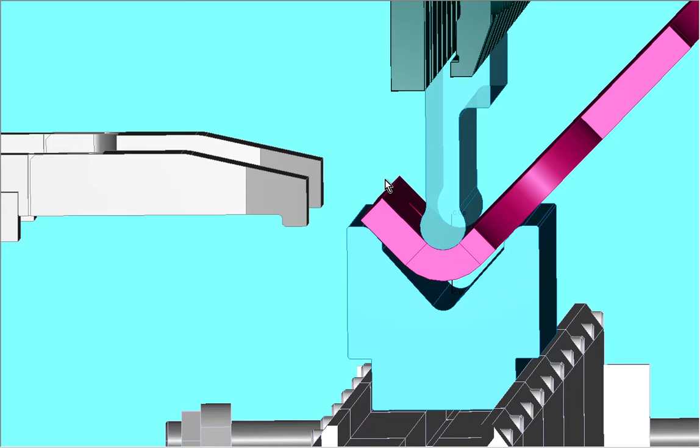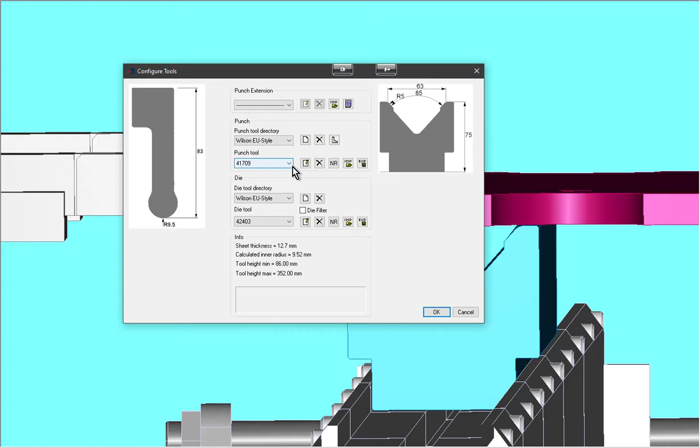I want to show you we've been forming these parts, trying to follow the CSA guidelines to prevent cracking. I'm just going to show you here. This is the punch, and this is the die that we were using.

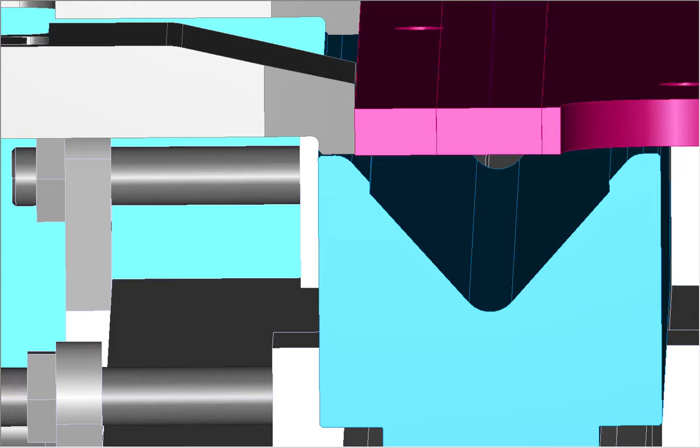As you can see, this bend here, the one that the email is about, needed more material because it's not even sitting on the die. Let me just change the view here. It wasn't sitting on the die, so that's why the extra material was required here.

I'll show you how it bends. Again, there's no material there, so we know it's going to fall in. But this bending here, from this point where the radius of the punch stops and the radius of the bend starts, to here, you've got more than double the thickness for what I call a cantilever moment. The point from here to here really has to be at least 3 times the thickness to have enough to bend the part without the tonnage damaging the tooling or sinking the punch into the material.

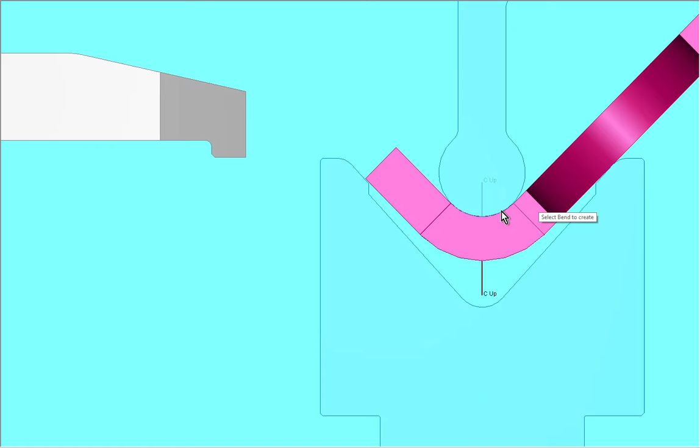So now here's a solution that we thought of. Instead of using the half-inch radius punch, which even that isn't within CSA guidelines - CSA guidelines say that for 44W, 50W, we should use 1.5 times thickness for the radius. That's not good. But if you can work with us, and I'll work with you, Sean and I will work with you at your next order to make sure you have the right material. You can ask for material that has good formability.

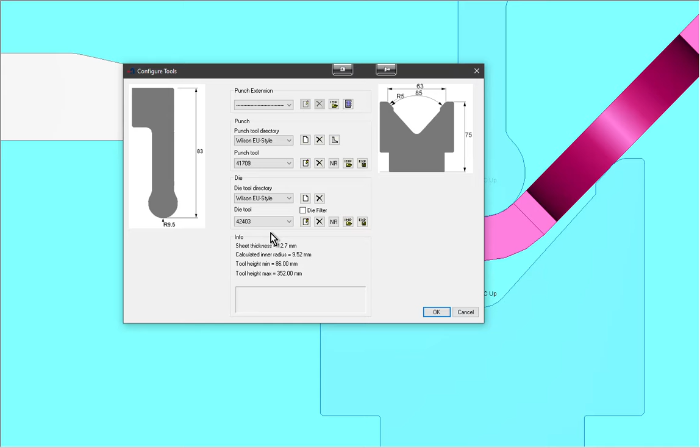We can change this punch to a 3/8 punch. Right now it's a half-inch, 12.7. We change it to 3/8, and we'll go down to a smaller die. I'll show you, this die wasn't possible with a half-inch radius, but if we change it to a 3/8 radius punch, watch what happens.

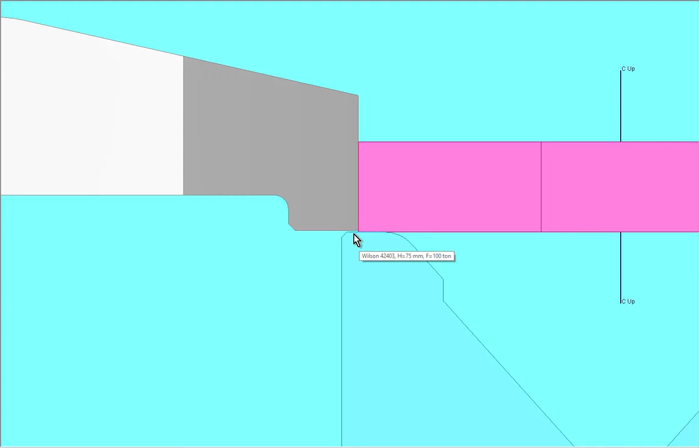See here, we can form it. There's much more better material sitting here in terms of sitting on the ledge. Now I'm going to ask you, if this works, to add a 16th to here. And that should keep your part still in tolerance for your customer, and that way you can avoid any machining.

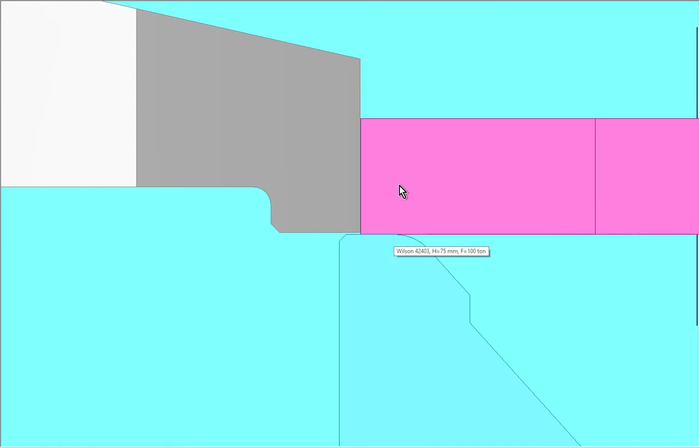So this is quite small, this amount. We like to see this overlay or overlap between the top of the die and the part to be at the very minimum half the thickness. You can see it's not half the thickness. It's about maybe a third.

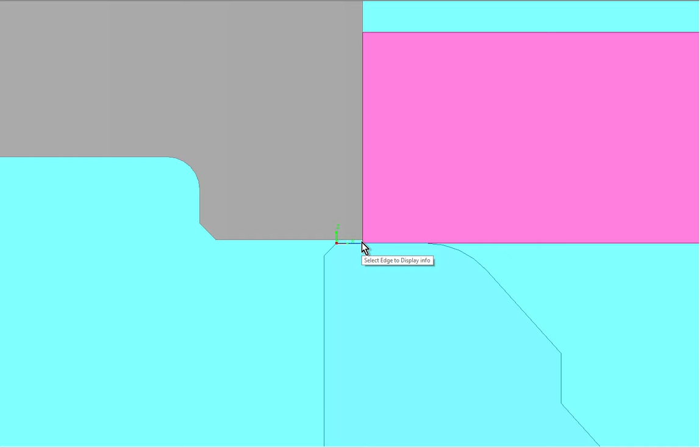But if we can go from here to here, I'll show you. If I measure from here to here... this distance here is 1.62 millimeters. You can't see it on the screen here, but it's 1.62 millimeters from here, which is basically a 16th. So you can add that, and you can form your part.

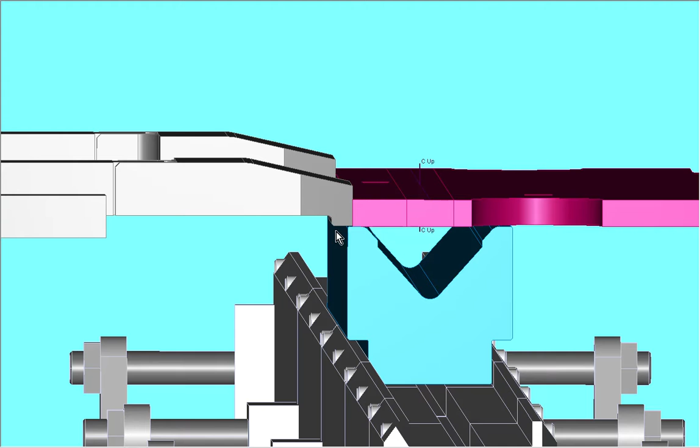I'll show you now what your part forming here looks like. Sorry, I just moved everything so you can see a little better. There you go, do it again. Again, so if we add a 16th to this edge, watch what happens. It forms nicely, okay? Now, we can't fix this, but you see this area here?

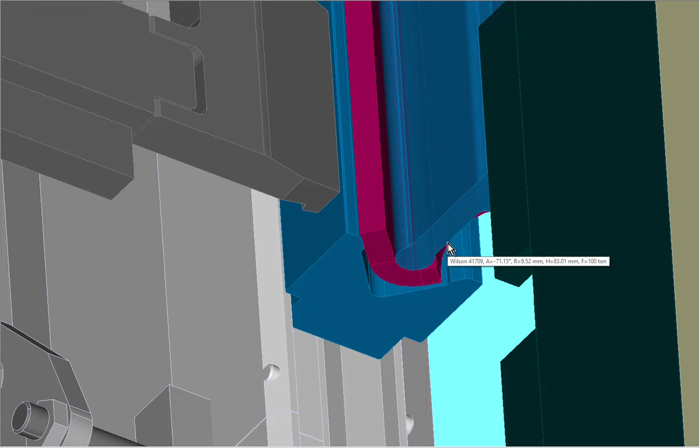I'm going to suggest to you that what you do is you add a square tab just here, in this area. And again, we can draw that for you and ensure it. And that way, on that flat - let me get rid of all the tooling here, just get rid of all the tooling here and flatten everything.

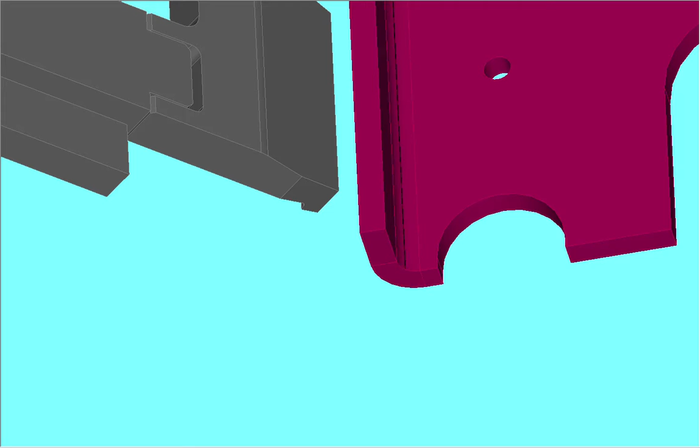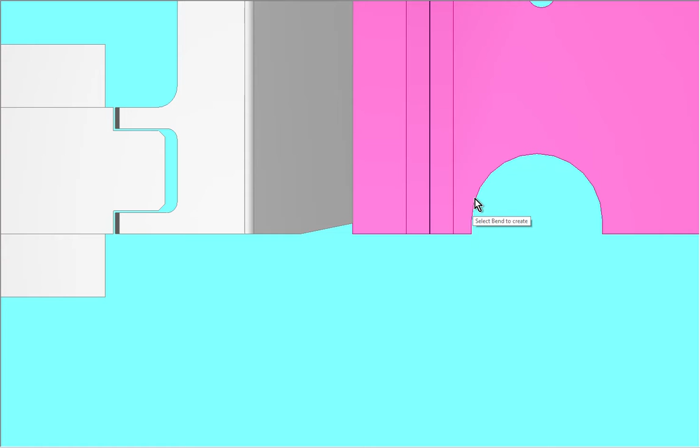Just a rectangular tab right here, just like that. Follow my cursor, okay? And you're going to leave all this alone. It won't be harmed at all. All you have to do is just machine just one little area, maybe 3/4 of an inch, or maybe 1 inch off, and you can leave the rest already there.

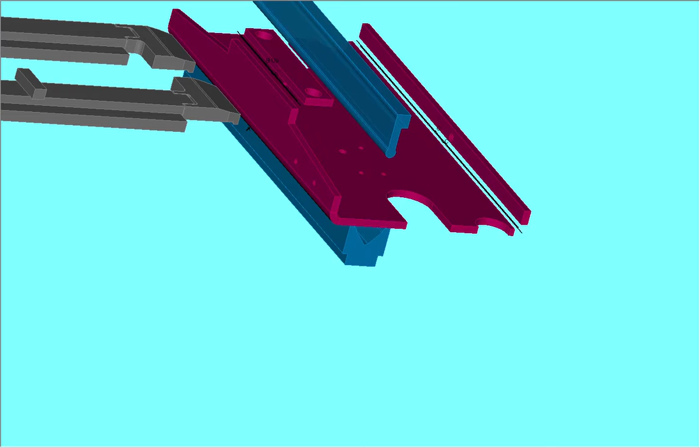Now let's go to the other bends quickly. I know this is a long video. The other bends here, we can actually eliminate the material on this as well. I'll show you when I put back the tooling. See that? By going to a 3/8 radius punch and this die, we can now get you this to bend with no material on this side.

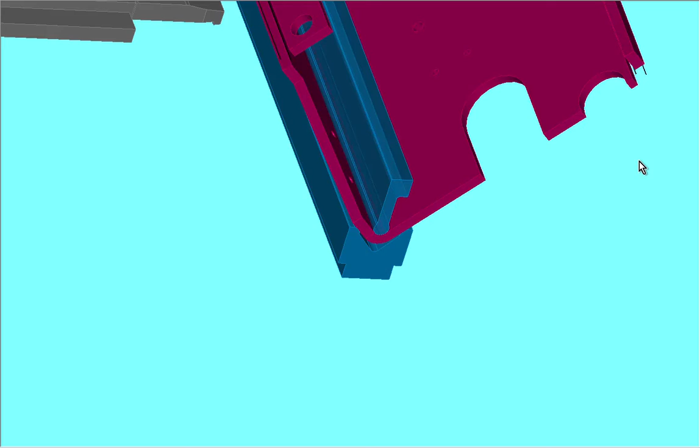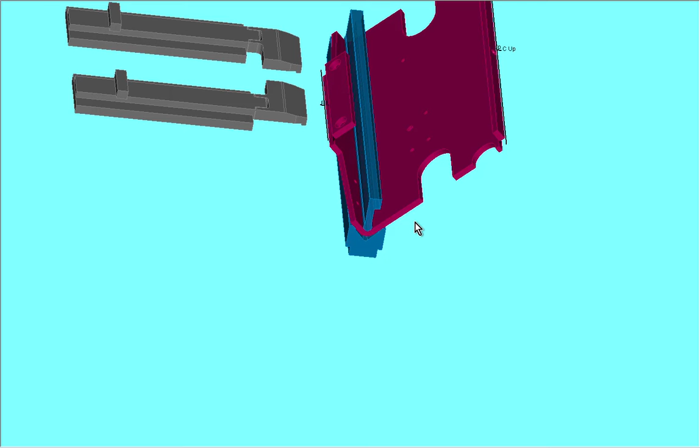So again, we can eliminate material everywhere except one little part of the cutout right here. And that can be a little tab, and we'll draw that for you and we'll work with you. Maybe at your next order, if you have extra material on the sheet, just cut a few test pieces. We'll pick them up, no charge, we'll bend them for you, those little test pieces. And if we see no cracking, then we'll know that we can proceed and eliminate all the machining except for that one little tab here and on the other side.